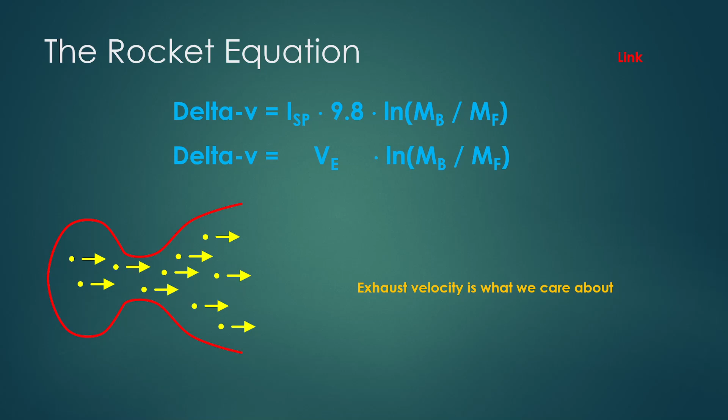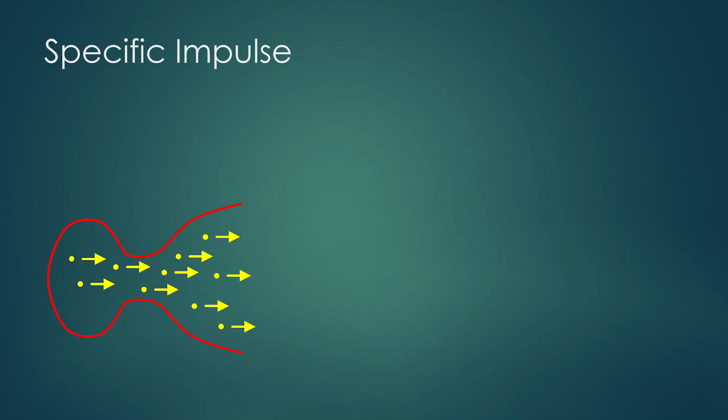This is kind of interesting, and I can come up with two good reasons why specific impulse is used so much. The first one is just number size. If you're looking at exhaust velocity, you look at numbers like 4410 and 3724. And just inherently, as humans, it's easier for us to deal with a number like 450 and 380. It's easier to remember, easier to compare them in our head.

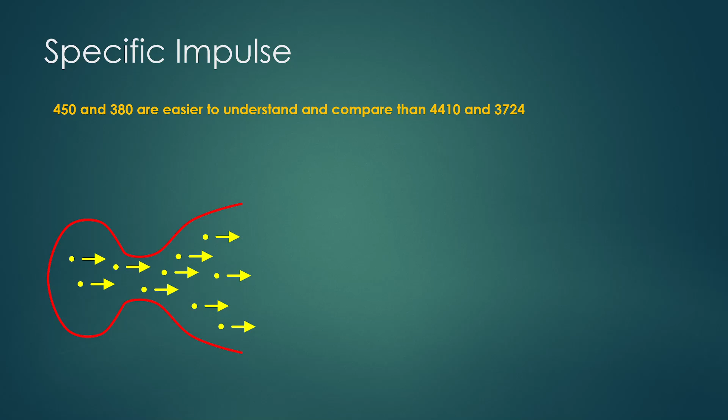The other reason is interesting and kind of historical. At one time, there was a lot of rocket engine development going on in the US, and development going on in Germany and elsewhere. As you probably know, in the 60s, and certainly in earlier times, the US was using the imperial system, feet and pounds, while the rest of the world was using the metric system. So what that means is if you're measuring exhaust velocity, you're measuring in different units.

So in the US, you might have this exhaust velocity, 11,896 feet per second. In Germany, you might have an exhaust velocity of 3626. And to compare the two, you have to do conversions, and that just isn't a lot of fun. It makes it more tedious, and you sometimes make mistakes.

So somebody, and I don't know how this arose, noted that there was something else we measure in units that are kind of close to these. Gravity in US units is 32 feet per second squared, and gravity in metric units is 9.8 meters per second squared. So somebody realized, hey, if you just take this exhaust velocity and divide it by gravity, you get this number. And because the units you get are seconds, and seconds are the same in these two unit systems, they end up being the same number.

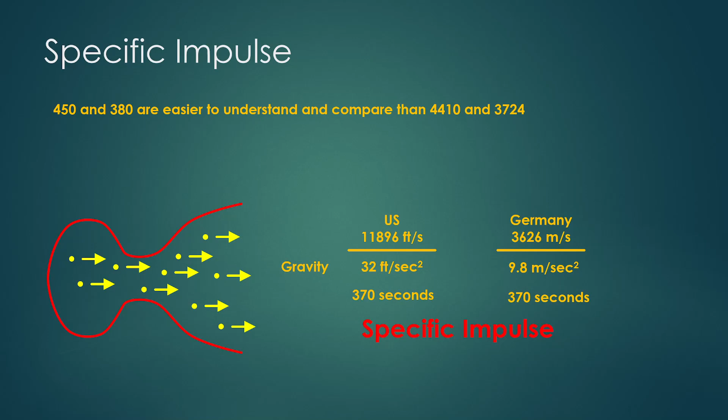Now, it turns out, as far as I can tell, in current development everyone's using the metric system, at least the engines I've looked at in the US, and we still use specific impulse, not really because we need to normalize, but because it's what we've traditionally used and the smaller numbers are nicer.

You will find, if you dig into different things, a definition for specific impulse which says something like the number of seconds 1 pound of fuel can produce 1 pound of thrust. And that is a true definition.

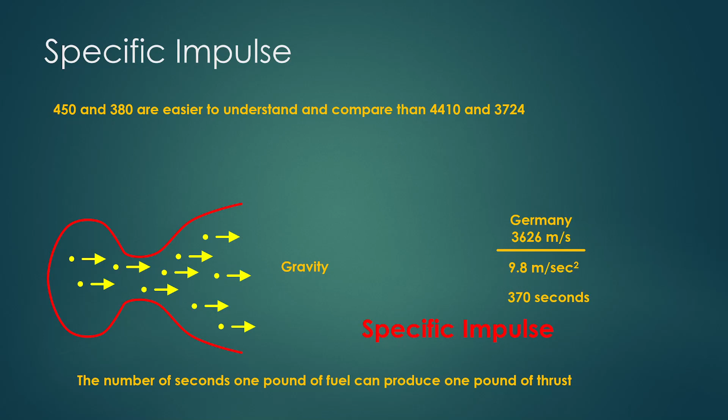Unfortunately, it's not really a useful definition. It doesn't have an engineering use. The real reason we do it in seconds is that's what ended up when we did normalization. That is why people talk about specific impulse, and they never actually talk about seconds when they're talking about it. It really just doesn't matter.

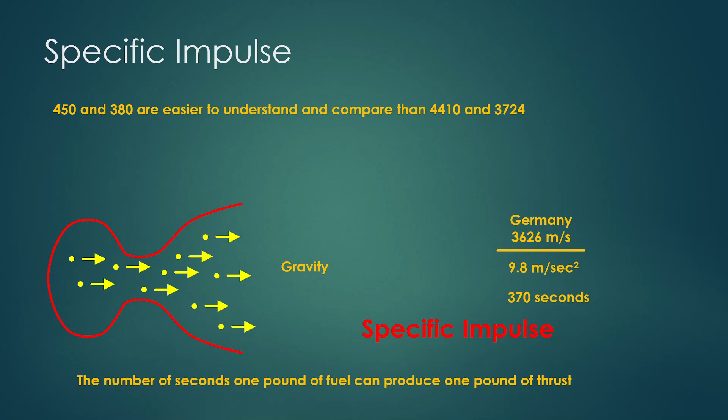So I want to move and talk about exhaust velocity. In this talk, I'm going to flip between exhaust velocity and specific impulse. Sometimes I'll talk about one, sometimes another. As I just showed, they really just differ by this constant. So anything that makes exhaust velocity higher makes specific impulse higher, and vice versa. Some of the concepts are easier in terms of exhaust velocity, some are easier in terms of ISP.

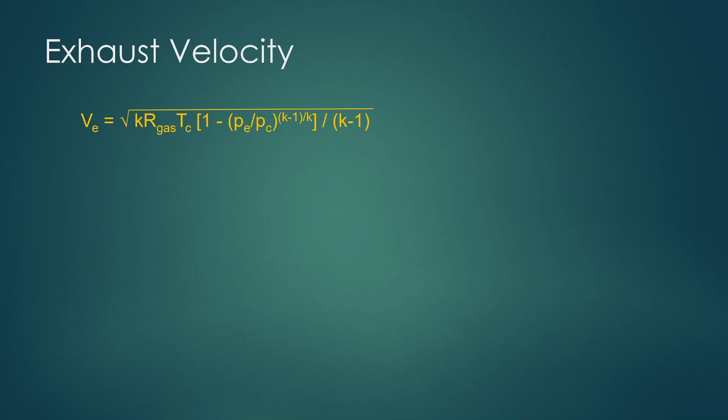If we want to calculate exhaust velocity, you can dig into the engineering textbooks and come up with a nice equation like this. And of course, you want to know what all those terms are. Luckily, for the sake of this talk, I don't actually want to calculate exhaust velocity. What I want to do is figure out what the various factors are that likely influence exhaust velocity in rocket design, in engine design, and then figure out what changes or approaches or trade-offs designers are making to try to get a high exhaust velocity.

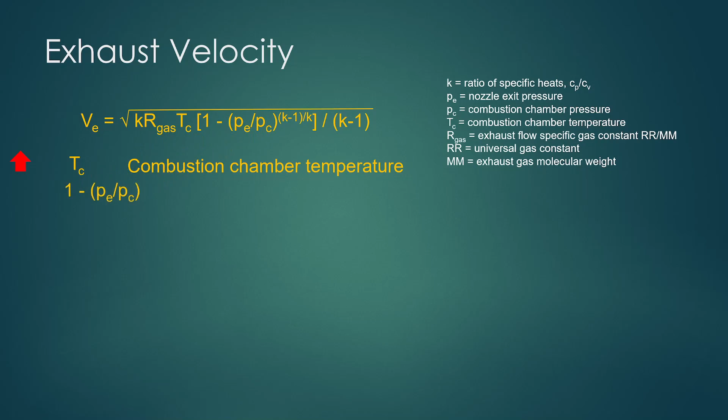So I'm going to pull a few things out of this equation. The first, TC, combustion chamber temperature, so how hot it is inside your rocket engine. We want that to be higher. If that goes up, exhaust velocity goes up. Second term, I'm going to call this nozzle pressure factor. This one's a little complex, we'll go into more details. We also want this to be higher. If that's higher, exhaust velocity goes up.

And then finally, we have R gas. The little note on the side says exhaust flow specific gas constant, RR divided by MM. RR is the universal gas constant, and MM is really something very interesting, exhaust gas molecular weight. Now we want R gas to be higher. This constant is just that, a constant, so that means we want exhaust gas molecular weight to be lower.

Two caveats. The first thing is beware the square root here. Because of the square root, even if we doubled everything inside it, we'd still have to apply the square root. So if we could double this gas constant or double the combustion chamber temperature, we only get 1.4 times the exhaust velocity and the ISP. Double this and you get 40% more ISP. There's also a mystery factor that also plays in here that I'm going to talk about later. It doesn't really show up in this equation.

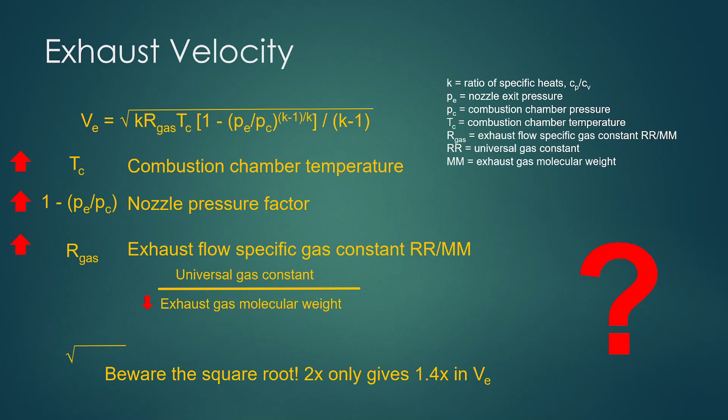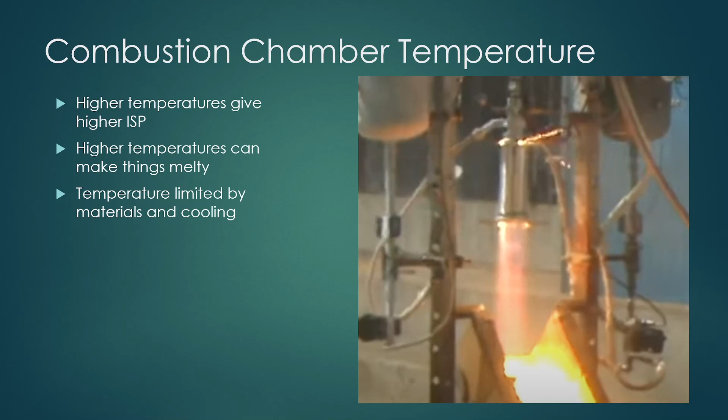The temperatures that you can run are really limited by the materials you're using and how much cooling you have. What that means is that from that perspective, you can't really change a lot of things. You kind of get, based on your material and your cooling, a specific temperature you can run at, and you're just kind of stuck with that.

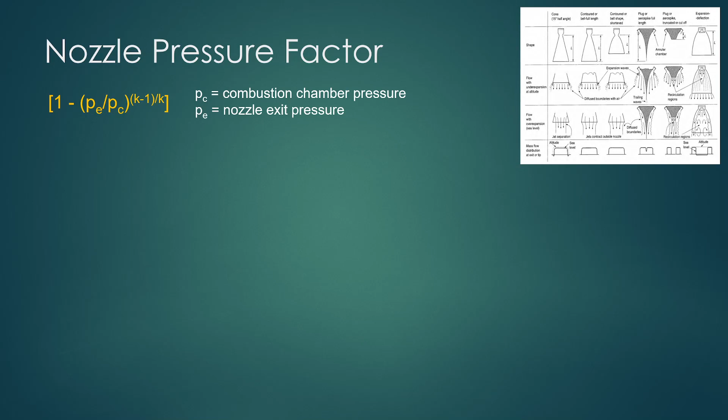Nozzle pressure factor is a little more interesting. Here's the full term, and the big things I care about here are PC, which is the pressure in the combustion chamber, so how much pressure we have there, and then PE, the nozzle exit pressure. Now, the equation is a little weird since it's 1 minus. What we want is PE over PC to be as small as possible, and therefore we want high combustion chamber pressure. That makes the denominator big, which makes the overall fraction small. And we want low nozzle exit pressure, that makes the numerator small, and therefore the overall constant small.

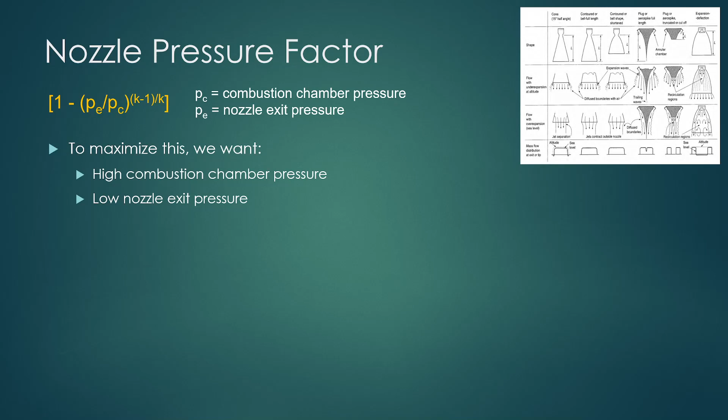So go through them one at a time. Combustion chamber pressure: the ISP that you get out is actually fairly closely correlated to your combustion chamber pressure.

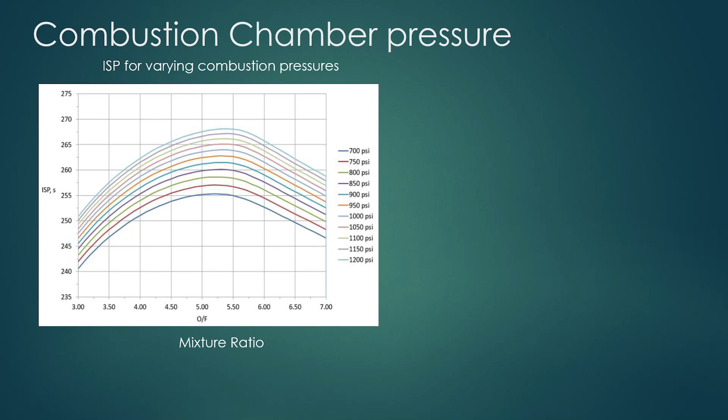What we can see is, starting at the bottom curve at 700 psi, as we keep increasing chamber pressure, things keep going up. So this looks great—we keep increasing chamber pressure and we keep getting more ISP. That looks pretty straightforward. The problem is that increasing chamber pressure is difficult.

This pump runs at 32,000 RPM. It generates 73,000 horsepower—that is not a typo. Just pumping the fuel requires 73,000 horsepower. That does not make it an easy thing to design. Turbo pumps are very, very difficult to design.

Especially in this case, the hydrogen pump is hard because hydrogen you have to pump a lot of, since it's not very dense. The oxygen pump on the other side of the engine, if I recall right, runs at 25,000 RPM and only requires about 23,000 horsepower, so it's a little easier to design.

So the combustion chamber is great, but you need advanced turbo pumps to be able to do it, and that is hard.

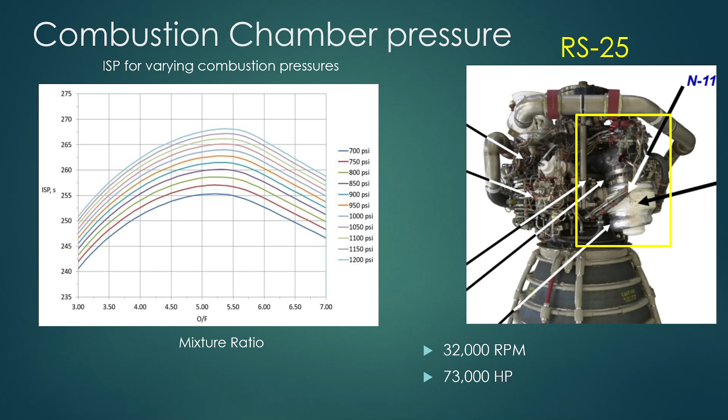Now let's go look at nozzles. Nozzles are really kind of interesting. I'm going to talk about the bell nozzle, which is pretty much what's used in every rocket engine right now. What we are trying to do is choose the right nozzle size based upon the altitude where our rocket is operating. So if your exit pressure—let me explain this.

Starting at the top, we have the combustion chamber. Remember, we have very high pressure there. As the exhaust gas comes through, the nozzle gets bigger and bigger, and that expands out the exhaust. And when it expands, it gets to a lower pressure.

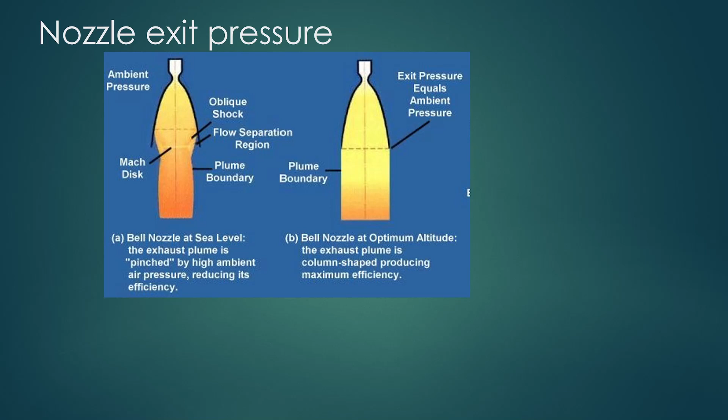This is called being overexpanded—the nozzle is trying to expand the exhaust gas to a lower pressure than we actually have. If you've ever seen something like this in an exhaust test, or behind airplanes sometimes, these are called mach diamonds. Mach diamonds look really cool and are kind of considered a sign of efficient combustion, but they're actually a sign that your nozzle is overexpanded—it's not the optimal nozzle for the current air pressure.

Now, not surprisingly, at sea level we see one thing. If we get to high altitude or up into vacuum, this same nozzle will show something else: the pressure at the end of the nozzle is higher than the pressure outside. So the nozzle doesn't keep the exhaust going straight down—the exhaust kind of leaks out to the side, and you lose efficiency because of that. This is called underexpanded: the gas, when it hits the edge of the nozzle, has not been expanded down to the ambient pressure.

If you watch Falcon 9 launches, you will see this all the time on the first stage. When the first stage launches, the exhaust comes straight out the bottom like the middle picture. Once it gains quite a bit of altitude and gets close to staging, the exhaust comes way out to the side. That is because the nozzle is underexpanded.

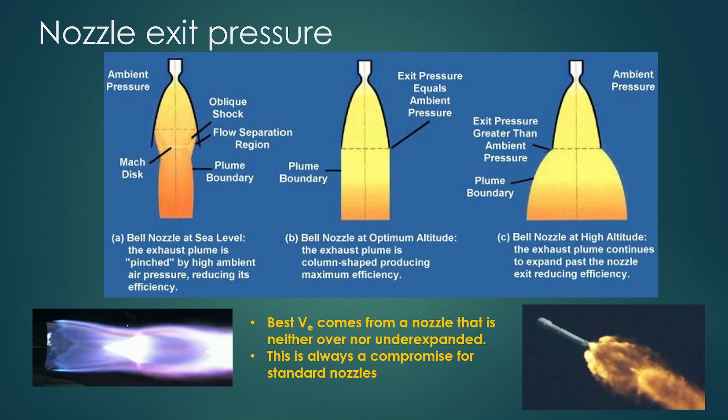So that is nozzles. You remember we had a term in that equation for exhaust gas molecular weight. That's what I want to talk about now. I'm not going to talk about exhaust gas yet, I'm going to talk about kind of a physics example first.

So here we have two carts, think of them as railroad carts. On the top one, we have 10 balls, each weighs a kilogram, think of these kind of like cannonballs. The bottom one, we have 4 balls, each weighs 2.5 kilograms. So in total, we have 10 kilograms up top, and we have 10 kilograms down below. You can think of this as our fuel, or our propellant is probably a better term.

Starting at the top, we take a ball, put it into our cannon on the back, add a little bit of explosive or propellant charge, ignite it, and the ball comes out the back. Just for sake of argument, let's assume it comes out at 100 meters per second. The question here is, how much force forward are we going to get from that? We can figure that out by calculating the momentum, which is just the mass times the velocity. So 1 kilogram times 100 meters per second gives us 100 kilogram meters per second. If we know the weight of the cart and the balls, we can divide that momentum by the weight, and that will tell you how fast our cart is going forward.

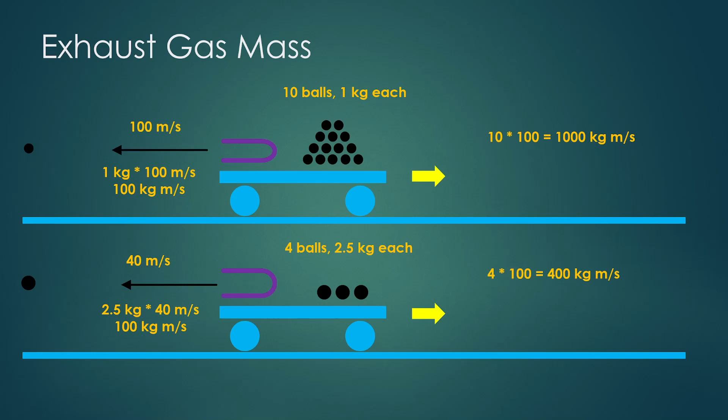And okay, that looks fine, it looks like we have something that's equivalent. But the important thing to look at is our fuel economy here. In the top case, we have 10 of these balls, so 10 times 100 kilogram meters per second gives us 1,000 kilogram meters per second. In the bottom, we only have 4 of them, so 4 times 100 equals 400 kilogram meters per second. So what did we find out? In terms of fuel economy, throwing light things fast is much more mass efficient than throwing heavy things slower.

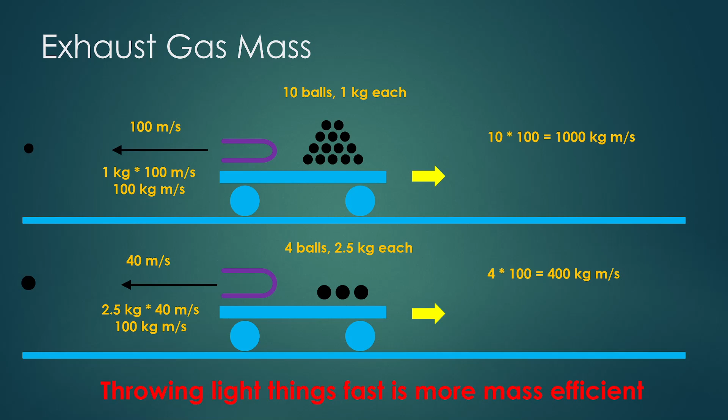Okay, now let's apply that to what we're talking about, to exhaust velocity. I'm going to look at some specific engines here. I'll also give you a warning that this has some chemistry in it. If you didn't enjoy chemistry in high school, you might have some flashbacks, so you might want to be prepared. If you don't remember your high school chemistry or never took it, you don't have to understand the details.

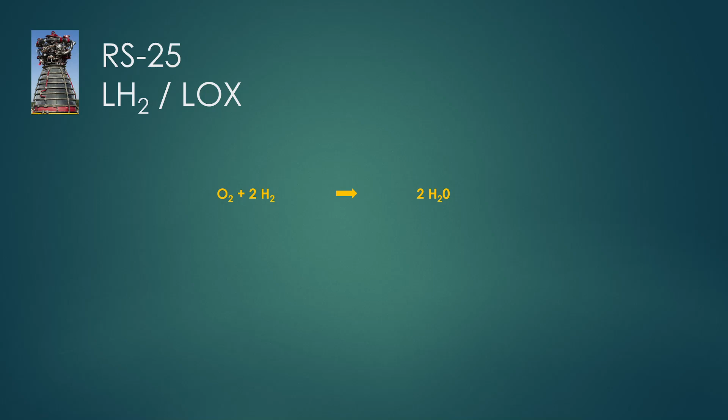So I'm going to start by looking once again at the RS-25, the Space Shuttle main engine. This engine burns liquid hydrogen and liquid oxygen. If we look at our chemistry, we take an oxygen molecule and 2 hydrogen molecules, put them together, ignite them, and we get 2 water molecules out the other side. This is what would be called in chemistry a stoichiometric equation, meaning we've balanced the same on both sides. You'll notice there are 2 oxygen molecules on the left and 2 on the right, there are 4 hydrogen molecules on the left and 4 on the right. Now, an interesting thing we can do is look at the atomic weight of our propellants.

An oxygen atom weighs 16, so there are 2 of them, giving us 32. Hydrogen weighs 1, and there are 4 of them here, so we have 4. In terms of weight, that gives us a mixture ratio of 8 parts oxygen to 1 part hydrogen. So if you're building the rocket, that's 8 kilograms of oxygen to 1 kilogram of hydrogen.

It turns out that's the mixture ratio that gives the most complete combustion. But if you look at an RS-25, the mixture ratio they list is 6.03 to 1 rather than 8 to 1. There are a couple reasons for this. One is that if you run at the ideal mixture ratio, you get hotter combustion, and remember I talked about things getting melty if they get too hot. So that's one reason.

But there's a really interesting other reason going on here - actually a second reason. When you're building a rocket engine, inside the combustion chamber you do not get a perfect mixture of the two propellants. Some places will have a little more oxygen, some will have a little more hydrogen. So if you ran at the ideal ratio, you'd have spots with free oxygen, and free oxygen at very high temperatures just wants to eat up the inside of your engine. So generally engines don't run at that ratio, even if it would be fine from a temperature perspective. You just want to make sure you don't have any free oxygen there.

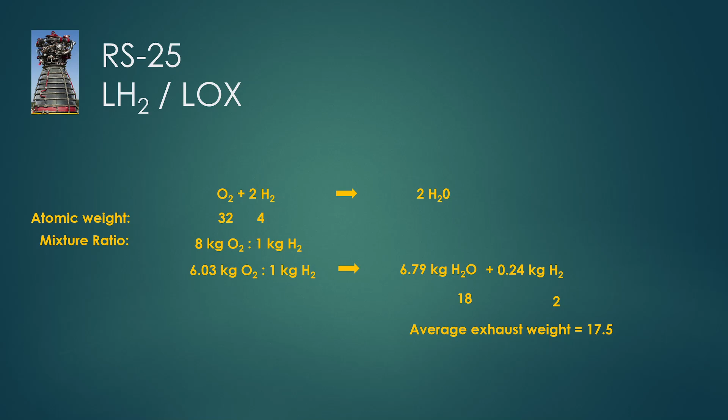So that means in our engine we have quite a few of these big water molecules coming out. They come out fairly slowly because they're heavy. And then we have a small amount of hydrogen molecules coming out, and they come out pretty quickly.

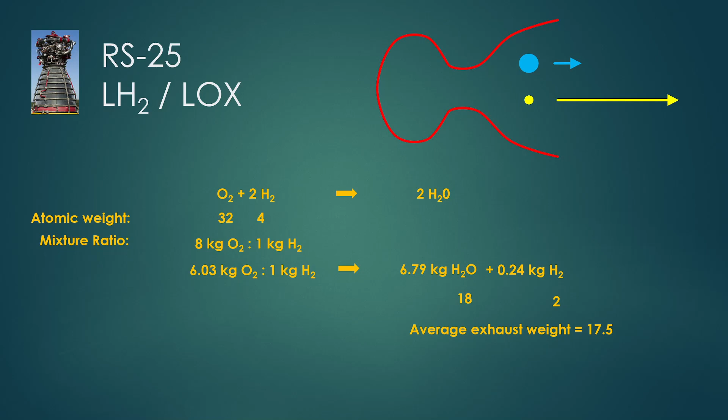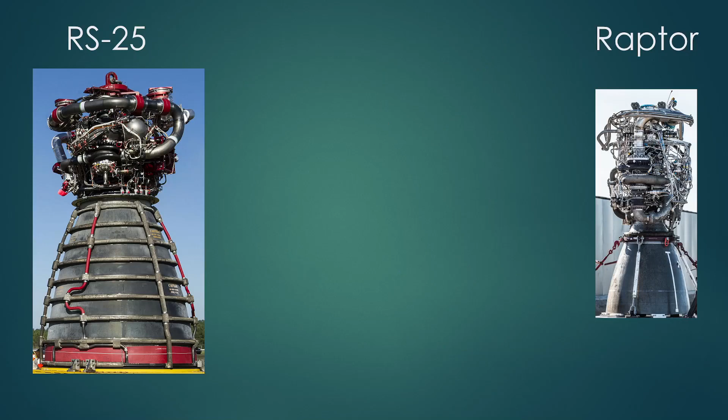So now I've looked at the two. You're probably not surprised I'm going to compare them. The average exhaust weight was 17.5 to 31.9, so the ratio between that is 1.8. Remember, we had to take the square root. So the square root of that is 1.35. So if all things were equal, and all we had was the difference in propellant, we'd expect that the RS-25 would have an exhaust velocity and ISP about 35% higher than the Raptor.

So go and pull some numbers. Vacuum ISP: the RS-25 is 452.3, the Raptor is estimated to be 348, so the factor is 1.3. I first ran these numbers and I was pretty excited - it looked like all these calculations make sense. Well, then I ran the sea level numbers: 366 versus 333, 1.1 is the value we get. And that is not 1.3.

And there are a couple things going on here. I think the first thing is simply that Raptor is a more advanced engine. It runs at a considerably higher chamber pressure, and as we know, chamber pressure will give you more ISP. So we wouldn't expect to see this exact ratio. But there's something else interesting going on here, and I think it's a really interesting point in engine design.

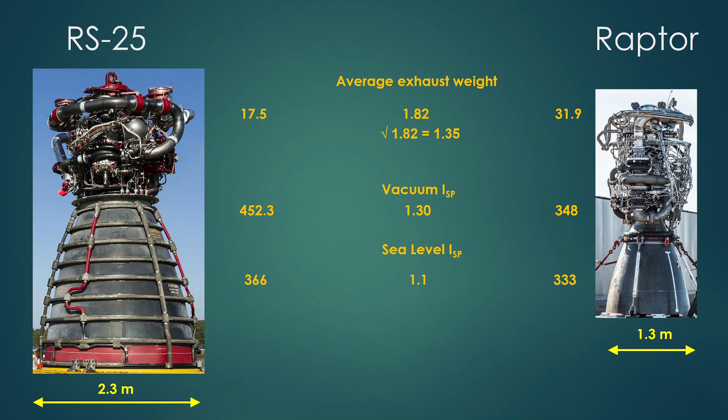As close as possible, I tried to make these the same scale. And something you may have noticed: the RS-25 has a nozzle that's 2.3 meters across, and the Raptor has a nozzle that's 1.3 meters across. So quite a bit different in nozzle size. So remember what we talked about in nozzles? What that means is we would expect that the RS-25 has more of a high altitude nozzle, and the Raptor has more of a low altitude nozzle.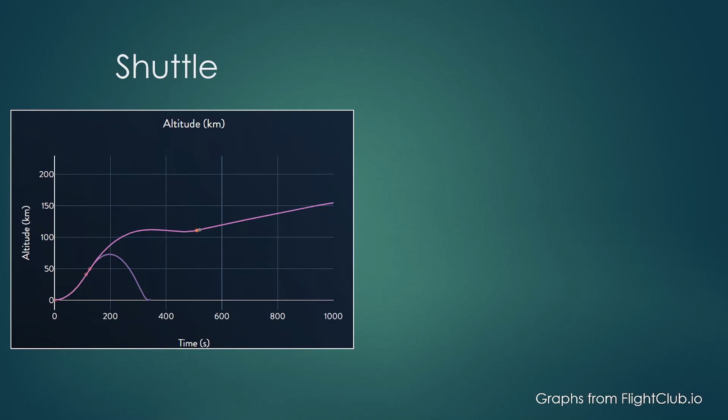Is that expected? Well, I went to flightclub.io, which is a great resource, and I found some simulations of the shuttle - this is what we would expect on a shuttle flight. I also grabbed one for a Falcon 9. I thought about using one for Starship Super Heavy, but I think it's a little too speculative, and I can make the same point with the Falcon 9, so I chose to do that one. The same points make sense.

If we look at the Falcon 9 chart, we notice in this little square, this is the place where the first stage engines are running. So that Raptor we showed will be the same - it's a sea-level Raptor designed for the booster, so that's where that engine runs. And because it only runs here, it sees this range of air pressures. At sea level it's 1, and then up to staging, when it stages, it's pretty much nothing.

So what that means is SpaceX has therefore chosen a nozzle size that makes sense for that range of pressures. They need to have efficiency at sea level, and they also need to have efficiency up high, so they've chosen this nice compromise nozzle. They also need to be able to fit nine of them in the back, and that may have affected it a little, so we'd expect a relatively small nozzle. The design for shuttle is really different. If we look over here, this box shows the range that the RS-25 needs to run in.

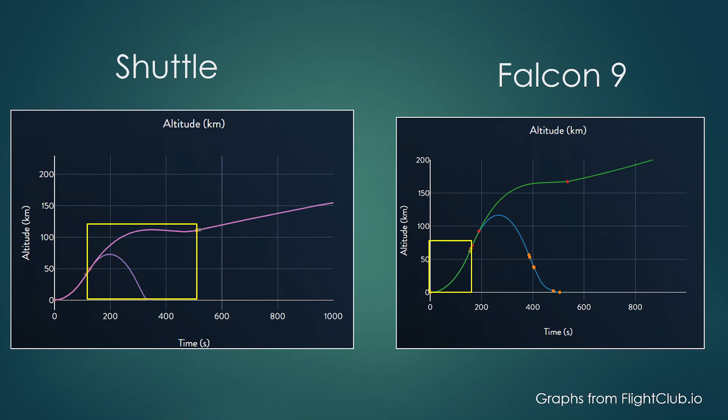So let's go on and look at another engine. I wanted to look at another advanced engine, so I chose the RD-180, which is probably an equal technology sort of engine. It runs on RP1 and liquid oxygen.

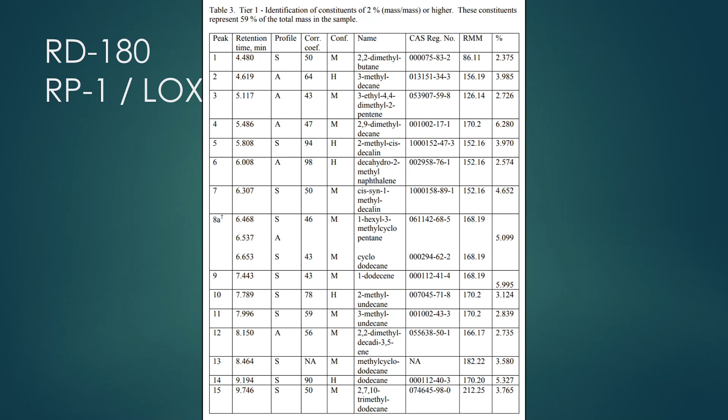So I wanted to do the same chemistry analysis, so I started doing some research and found the analysis of what RP1 is. Of course, RP1 is just kerosene. I found that listed in this table, and you can see there are 15 different components. And then there's this table, and there's also these two tables.

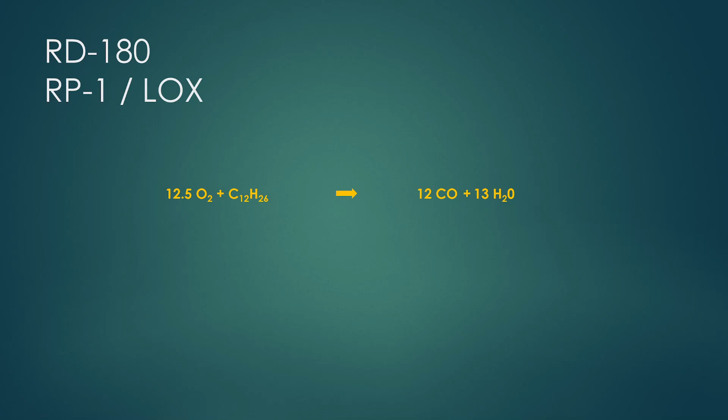At that point, I just pretty much gave up. You can go and find some estimated equations, and here's one that it looks like. You really cannot do the kind of analysis I want on this because C12H26 is an average — it's a bunch of molecules put together, not individual molecules — and this just was not going to work. So I basically decided to abandon looking at RP1.

I did want to look at two other interesting cases, and these are non-chemical rockets — cases where we're getting thrust not by burning the propellants, but by doing something else. The first one was a nuclear thermal rocket.

I have another link here if you want to know about nuclear thermal rockets. I have a talk that covers all the details about them, why they're good, and why I think they might not be as good. So go watch that if you want the details.

Now, for nuclear thermal rockets, I'm going to write an equation. This isn't chemistry because we're not doing chemistry — we take liquid hydrogen, we add a bunch of heat, and we get hot hydrogen. We can do the atomic weight thing: we start with 2 and we end with 2. This is why nuclear rockets look so impressive or interesting.

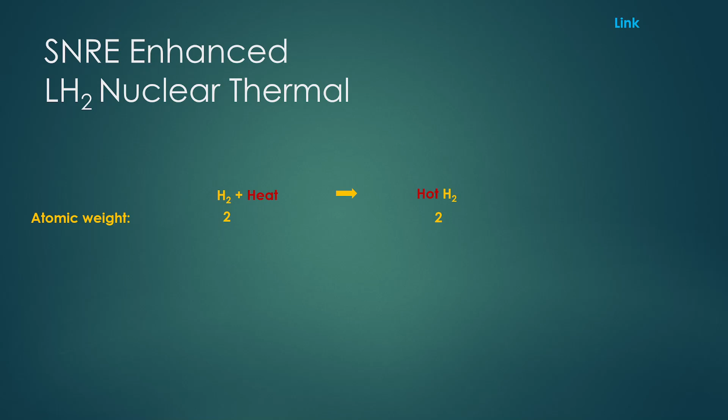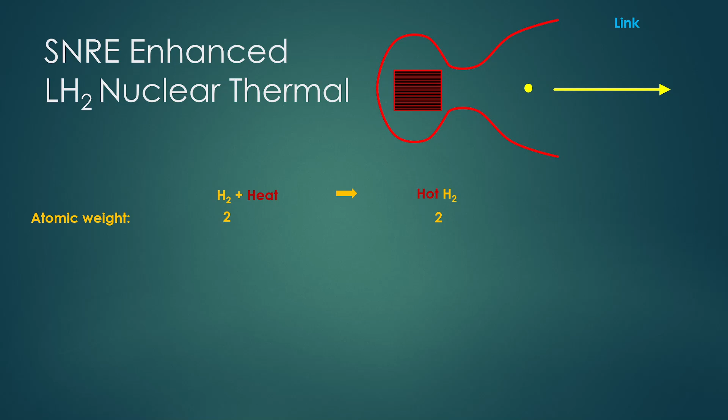Remember on the RS-25, we were about 17.5. Here, our exhaust weight is 2. And remember, from an efficiency perspective, smaller is better. So the engine has this nuclear core — we put hydrogen into it, and out of it we get hydrogen molecules, and they come out really fast.

So let's compare two engines: the RS-25, and the SNRE — Small Nuclear Rocket Engine. I'm going to use the numbers from the SNRE Enhanced, which is a little bigger version of this. I've tried to make them the same size, though the SNRE may actually be a little smaller here. I think it's running a vacuum nozzle, so the nozzle may actually be bigger than the one we'd expect on the RS-25.

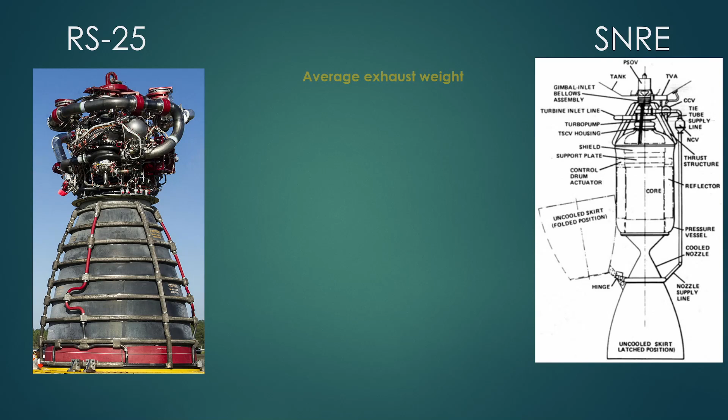So remember, average exhaust weight: 17.5 to 2 is 8.75, take the square root, 2.96. So we would expect that if we can get the same things going on in the combustion chamber, this thermal rocket would have an ISP about 3 times the RS-25.

Now, vacuum ISP for the RS-25 is about 450. SNRE is asserted to be about 900 — that's what the designers thought, though most nuclear rockets were never built. That would be a factor of 1.9, which means we really aren't seeing a factor of 3.

I suspect the nozzle for SNRE is actually bigger than the RS-25, because most nuclear rockets these days are designed to be used in orbit — if you try to use them from land, you spew radioactivity all over the place. So I wouldn't expect a nozzle difference that hurts it; if anything, I'd expect the nozzle difference would help the nuclear engine. So the question is, why are we seeing this?

Well, I decided to go look at exhaust temperature. The RS-25 is supposedly about 3,500 degrees Kelvin. SNRE is supposedly about 3,000 degrees Kelvin. That would give us a little factor, about 10%. So that's not really the factor going on.

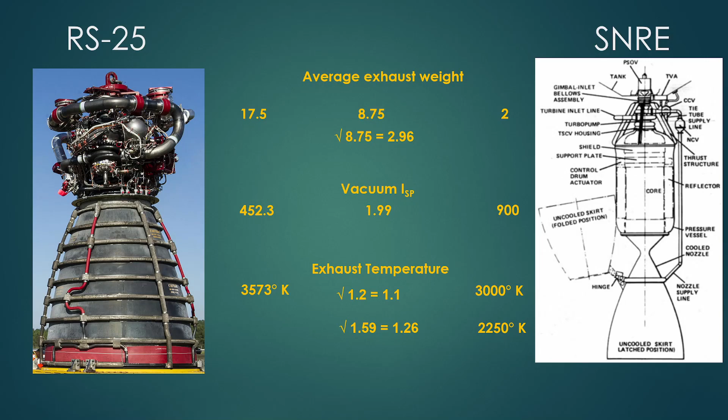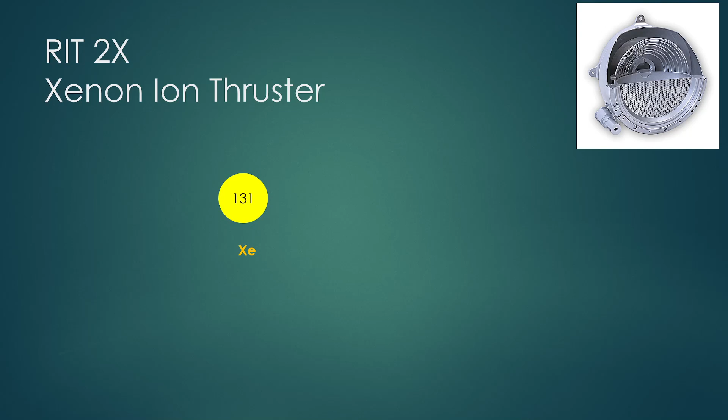So the final rocket I want to talk about is an ion thruster. This one is also not chemical, it's actually electric. I chose a real engine here that is used on communication satellites, and this is going to look really confusing. Ion thrusters typically use xenon, sometimes krypton, so inert gases. The xenon molecule is really big, it's 131 in atomic weight, and that seems to go against everything we learned earlier when we were doing the chemical approach.

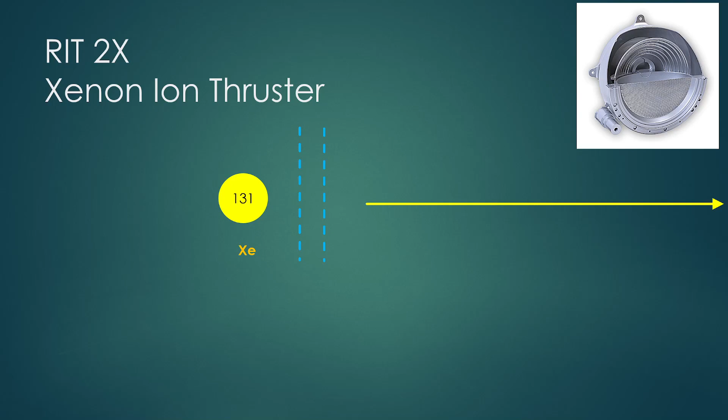But ion thrusters really work very differently. We take that molecule, put an electric charge on it, and then use an opposite electric charge on a grid, and the molecule comes flying out, extremely quickly. So it turns out in this case, I said small molecules fast are better than bigger molecules slow. This is a case of bigger molecules very fast. So these give very impressive ISPs, about 3000 for this thruster.

And that is, you go buy it off the shelf and it'll give you 3000 in ISP, and that's very impressive. There's a little problem here: the thrust is 200 millinewtons at 5,000 watts. As I said, it's an electric thruster, so if you have 5,000 watts of electric power, you put that into this thruster, you have a supply of xenon, and it will give you 200 millinewtons of thrust. Just for comparison, that RS-25 is 2 meganewtons of thrust, or about 10 million times more than this thruster can give you. So what does that mean?

It means you can use ion thrusters to get small amounts of thrust but run them for a very long time, and that works great if you have a supply of electricity. The reason you use these in communication satellites is that they already have to have a lot of solar cells to produce the power they need to operate, so you already have a power source there. With that power source and a thruster like this, or maybe multiple thrusters like this, it takes very, very little propellant to move from one position to another. So you can have more satellite, less fuel. It also means you can run your satellite for a longer lifespan on the amount of fuel it has. So that is why these thrusters have essentially taken over for communication satellites. You don't see chemical rockets on them anymore.

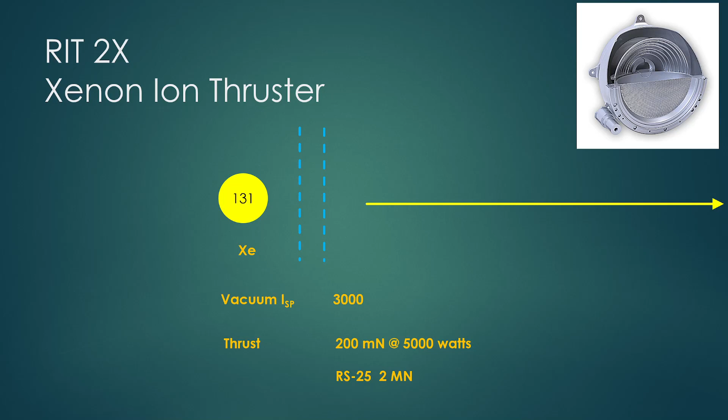However, of course, you don't get much thrust, so it only works in cases where going from one orbit to another might take months. If that's okay for you, great, these are a great choice.

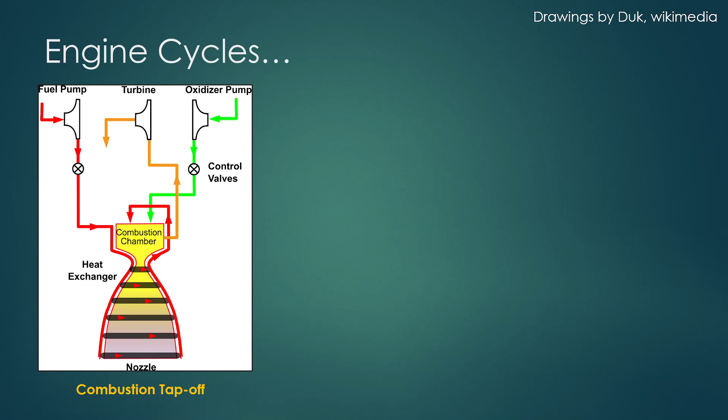We're finally going to get to the mystery factor, and this is about engine cycles. Cycles in this term are different ways of building your rocket engine. I'm not going to go into details here, but there are basically two different classes of engine cycles. Basically the problem is, remember I showed you the turbopump earlier, you need something to drive that turbopump. So a very simple design is called combustion tap-off: you put a pipe on the side of your combustion chamber, the gases come out, and you feed that through the turbine. There's another one called a gas generator, where you have this separate combustion chamber called either a gas generator or a pre-burner, and it burns some propellant. You run that through the turbine, and that drives your pumps.

So both of these have kind of a downside. The exhaust that comes out of that turbine goes overboard, so it's not going through the nozzle, meaning you aren't getting the benefit of the momentum from that exhaust. That has the equivalent effect of increasing your molecular weight, as you can think of it - you're essentially throwing away some of your propellant.

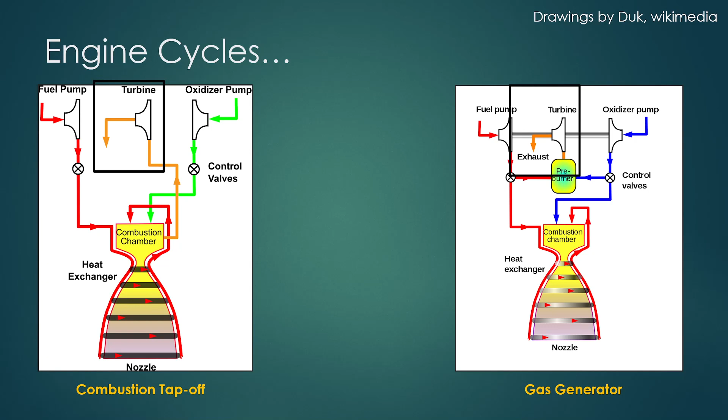So here's a nice SpaceX... I'm sorry, it's a SpaceX Merlin. We have a gas generator on the side, and as you can see, the gas that comes out of that does not go

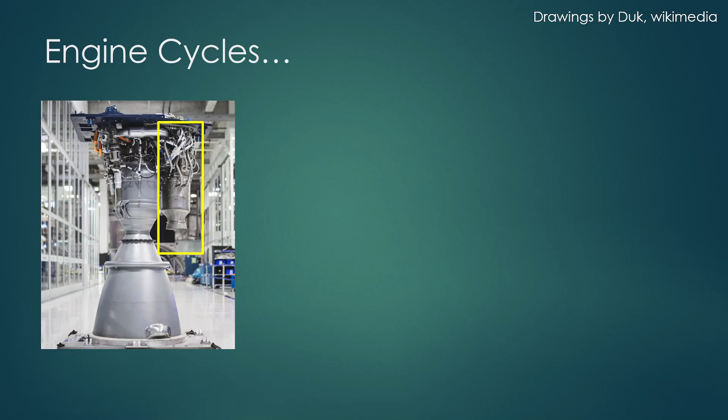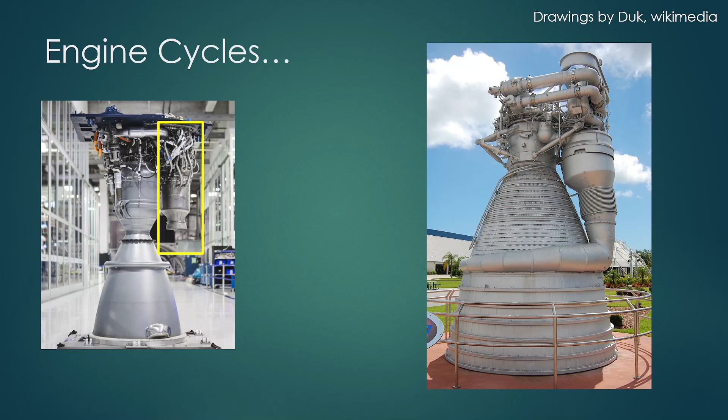You primarily do that for cooling purposes. The F1 does that. The Merlin vacuum also does that. You do that to keep the outer part of the nozzle cool. It's really not a big benefit from ISP as far as I can tell, because you have bypassed the combustion chamber. You get a little expansion between that point and the nozzle exit, but not really a lot.

So you'd obviously like to avoid throwing away some of your propellant. So here's another cycle, called the expander. You don't burn fuel to drive the turbine, you just heat up whatever your cold fuel is. So if you have a liquid cryogenic fuel, like liquid hydrogen, or you can do it with the oxidizer, with liquid oxygen, you heat that up in the nozzle, it expands, and it drives your turbine.

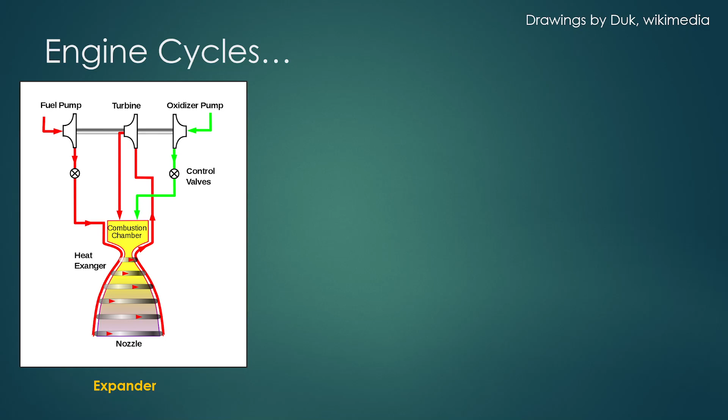So that means all of your fuel goes through the combustion chamber. That's good for ISP. There are some problems with expander in that it's hard to get a lot of power out of an expander engine.

And then finally we come to stage combustion, which is kind of the holy grail. In stage combustion, you have a preburner, or sometimes multiple preburners, and the output of that drives your turbine, but then you take the output from the turbine and that goes into your combustion chamber. So this gives you kind of the benefit of both designs. The disadvantage here is it's very hard to build. Your preburner has to run very hot because it has to have more pressure than the combustion chamber. So these are hard to build, but they work great.

And all of the three engines I talked about, the RS-25, the Raptor, and a little bit about the RD-180, all of those are stage combustion engines.

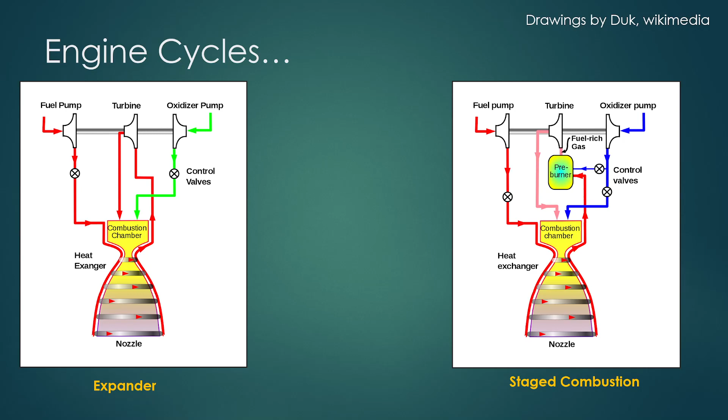So let's do a little comparison between two engines to see how much stage combustion gets you. Here we have the Merlin again. On the right, we have the RD-180 made by Energomash in Russia. You probably noticed it's upside down - that's the way they have it stored. They both burn RP1 and liquid oxygen, so this should be a fair comparison.

Sea level ISP, 282 versus 311, a factor of 1.1. Vacuum ISP, 311 versus 338, 1.09. So it's pretty close, and what that suggests to me is these have similar nozzles. They're both designed as booster engines, so we'd expect them to have similar nozzles. And that suggests that you get about 10% out of going stage combustion.

And 10% in ISP is a lot. The difference between 282 and 311 in terms of payload, in terms of delta V you get, is much more than you would expect. So that's why everyone wants to build stage combustion engines.

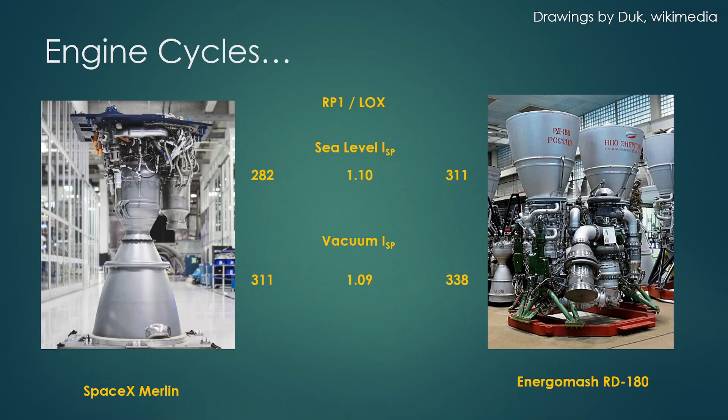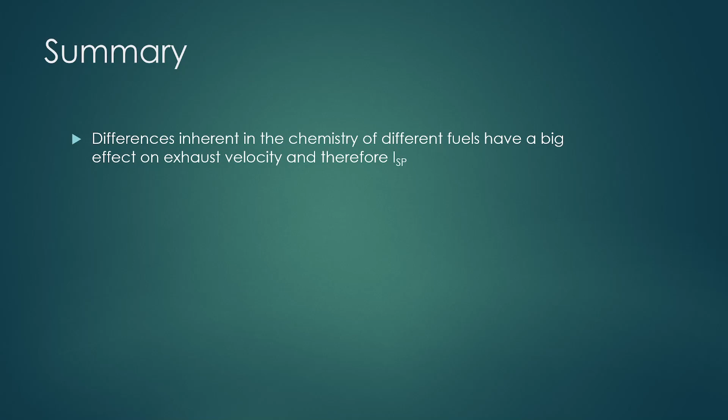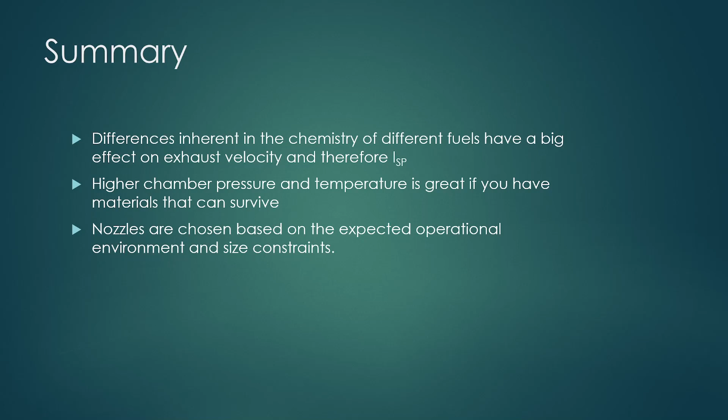Now, there are other trade-offs other than exhaust velocity and ISP. There are other reasons why you might prefer a different fuel. Higher chamber pressure and temperature is great if you have materials that can survive the chamber pressure and you're good enough to build the turbopumps. The nozzles are really chosen based upon the operational environment and the size constraints you have. You really are not optimizing nozzles in the same way you optimize engines. You just choose one that makes sense for whether you're doing a sea level engine or a vacuum engine or something in between.

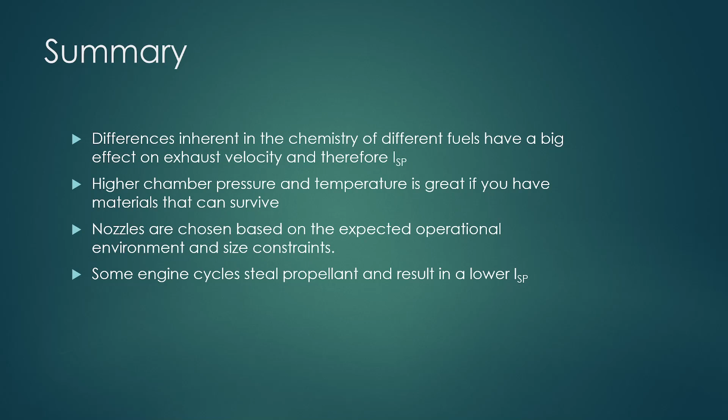Some engine cycles steal propellant and result in a lower ISP. Gas generator engines are great - you'll lose ISP, but they're a lot easier to build. Exhaust velocity makes more sense than specific impulse in terms of engineering discussions, but we're kind of stuck using specific impulse because everybody understands it and it's easy to compare.